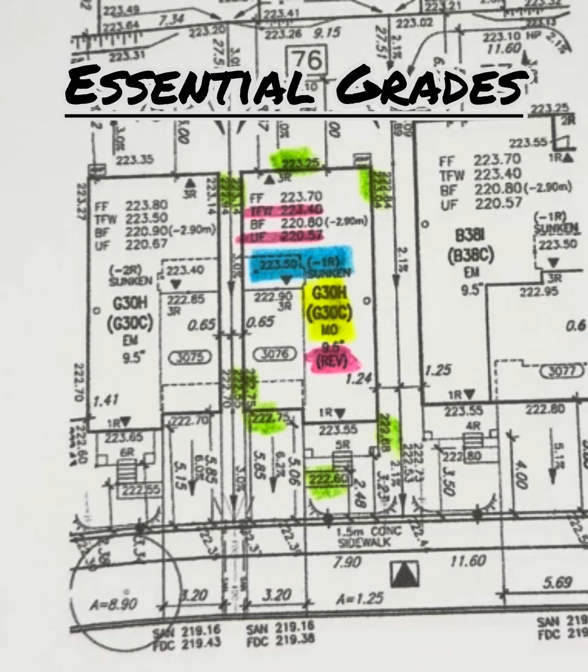All right, let's go through the Lot 76 breakdown. All the critical elements on this plan, with everything clearly highlighted so you can understand exactly what's going on. Here's Lot 76, and I've color-coded all the important features.

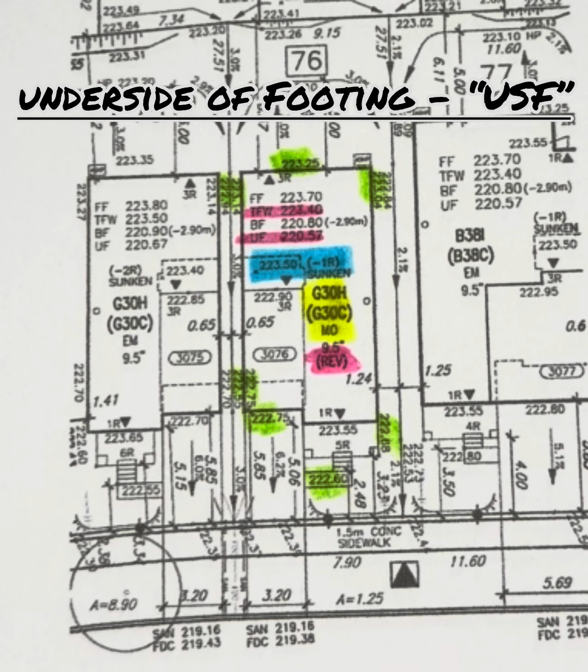Starting with the top of the foundation wall, highlighted in pink, we are at 223.40 meters above sea level. Then we have the underside of footing, also in pink, at 220.57 meters above sea level. These elevations define your structural foundation height and are key for everything that follows.

Next up, highlighted in yellow, we have the model type. This is a G30H MO modern elevation. And this one is also a reverse plan, meaning that the porch is on the right-hand side instead of the typical left.

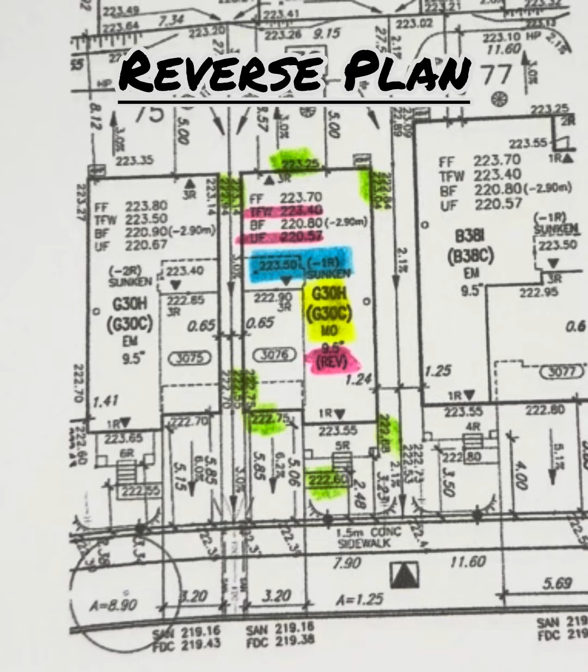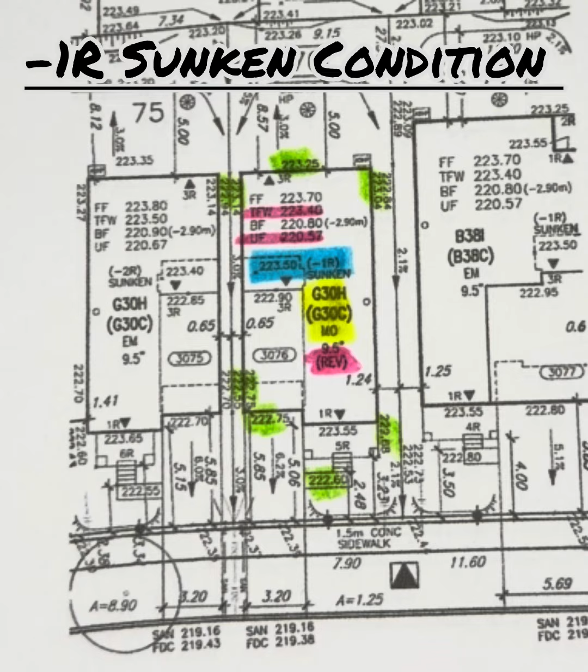Now let's zoom in on blue. Now let's correct something important. The blue highlighted area is not a sunken garage. It represents a sunken landing at the back of the garage. In this case, it's a one-riser drop. That translates to a roughly 7.5-inch drop from the top of the foundation wall down to the sunken landing. This is a small but critical detail because it affects transitions, drainage, and how the slab steps down in that area.

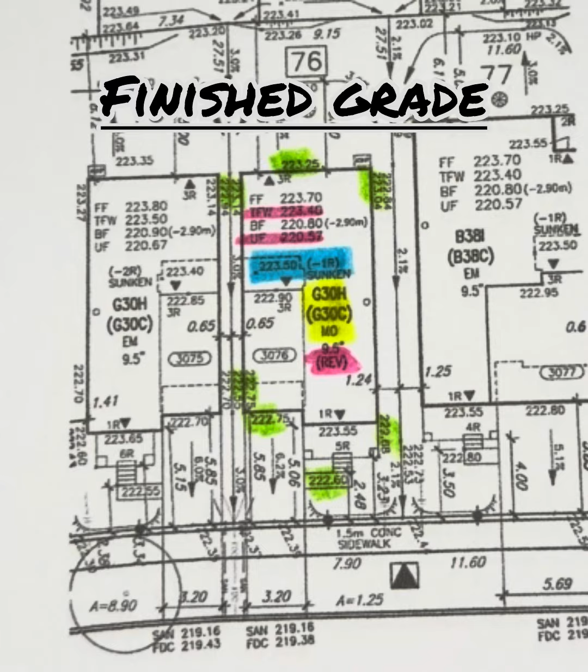Let's zoom to the green highlights. All the green highlights around the foundation show a difference between the top of the foundation wall and finished grade. This is one of the most important parts of the entire drawing because it determines how the house will sit on the lot visually, how much brick veneer is required, whether veneering is needed at all, and it makes preparing the cut sheet much easier.

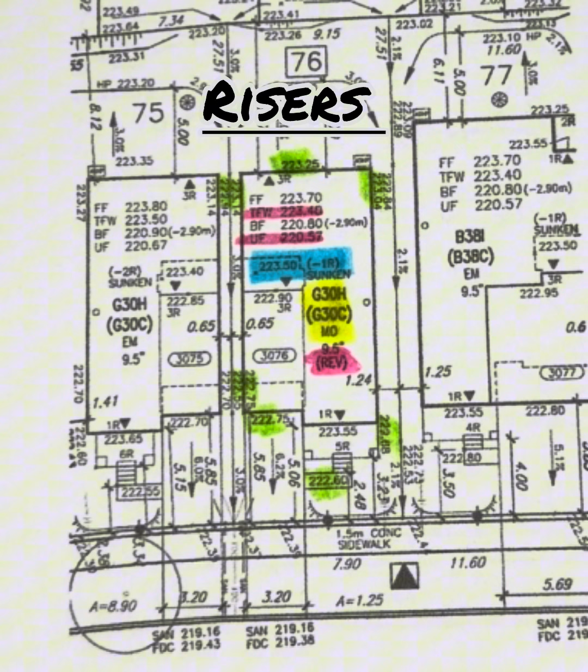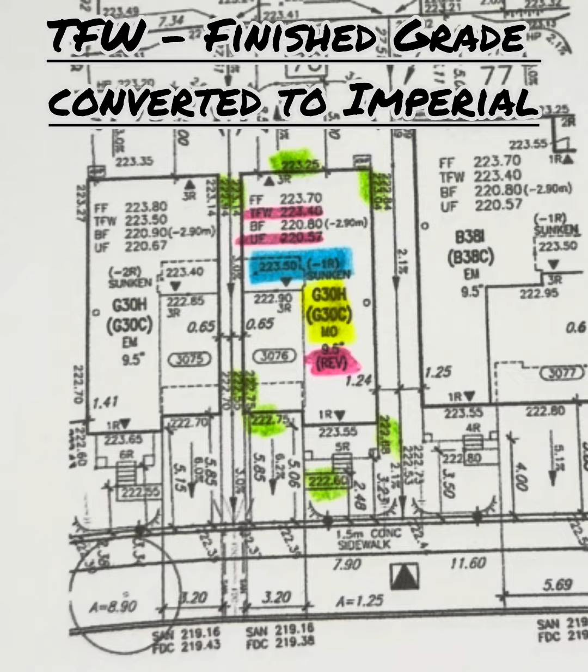Imperial conversion note. Now here's the key step. Even though everything here is in metric, we have to convert to imperial. That's because in low-rise residential construction, all working drawings and cut sheets are done in imperial. So accurate conversion is essential before moving forward. That's Lot 76. Once you understand these relationships, everything from grading to steps to finishes becomes much easier to plan. Now let's dive into how to calculate the finished grades around the foundation walls.

Okay, now we're going to establish the grades around the home, taking the top foundation wall number here, which is 223.40, and we're going to take away the finished grade numbers in green all the way around the foundation to determine how much exposed concrete we have across the entire envelope of the building. For example, if we have 6 to 12 inches of exposed concrete after we subtract the finished grade number from the top foundation wall number, then no brick veneer is required. We can leave it standard.

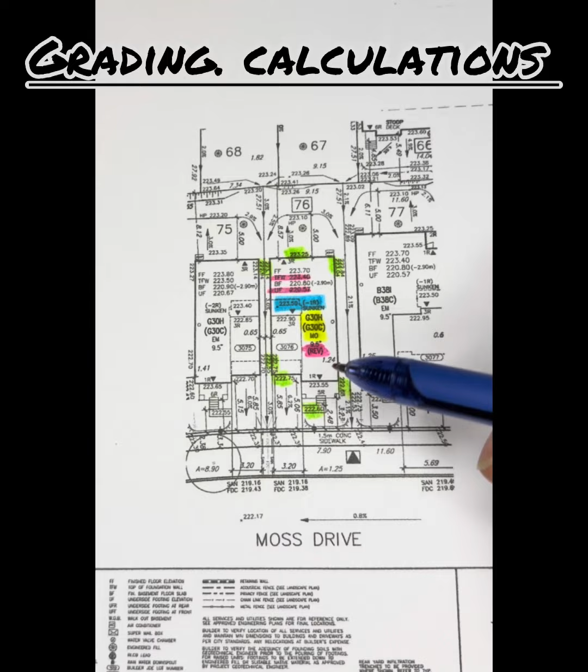If you exceed that 12 inches of exposed concrete, start getting into the 16s, the 18s, the 20s, the 24s, then we have to implement what's called brick veneer. Anyways, let's get into some calculations. We'll start right at the back. Again, our foundation number is 223.40, and we're going to take away 223.25, which is 15 centimeters. And remember, we have to convert this into imperial. So that ends up being 6 inches. And we'll just highlight that.

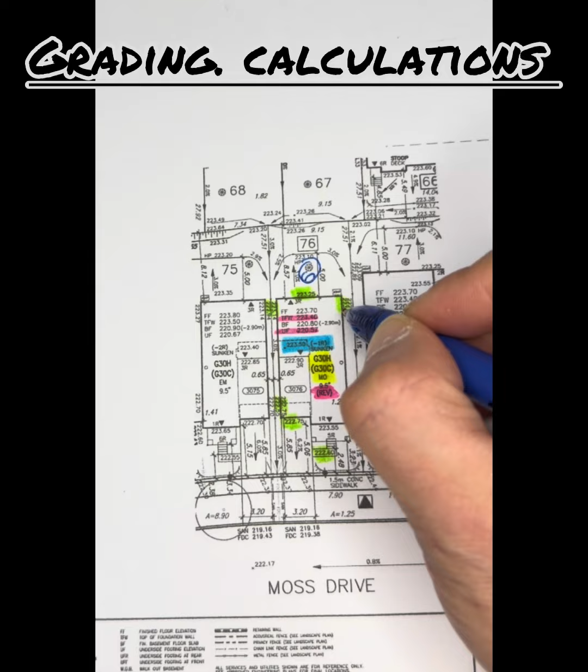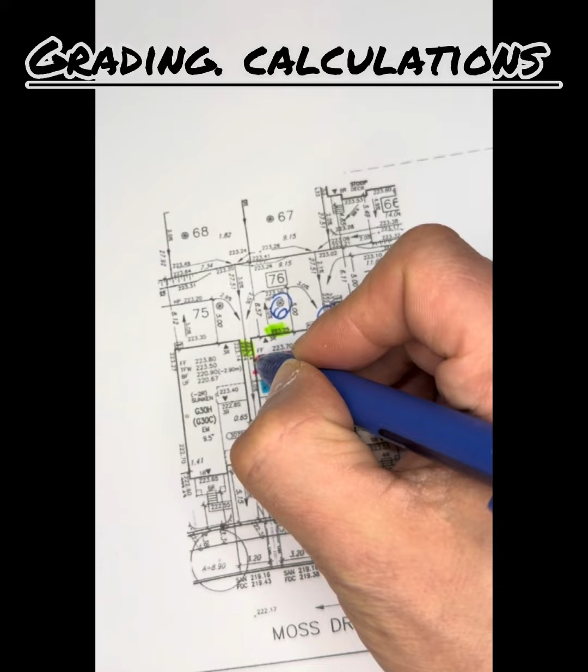Moving around the corner. Again, top foundation wall number, 223.4. And we're going to take away, if I can read this properly because it's very small, 223.04, which leaves us with 36 centimeters or 14 inches on the corner. So we'll write 14. On the other corner here, again, 223.40, take away 223.14. Leaves us 26 centimeters, converted into imperial, is 10.

So now we have our grades established in the back. 10 inches of exposed concrete, 6 inches of exposed concrete, and 14 inches of exposed concrete. So what we know now is that there is no veneer or anything else required in the back. It's a very standard elevation home in the rear. Now we're going to move alongside to the garage at the front.

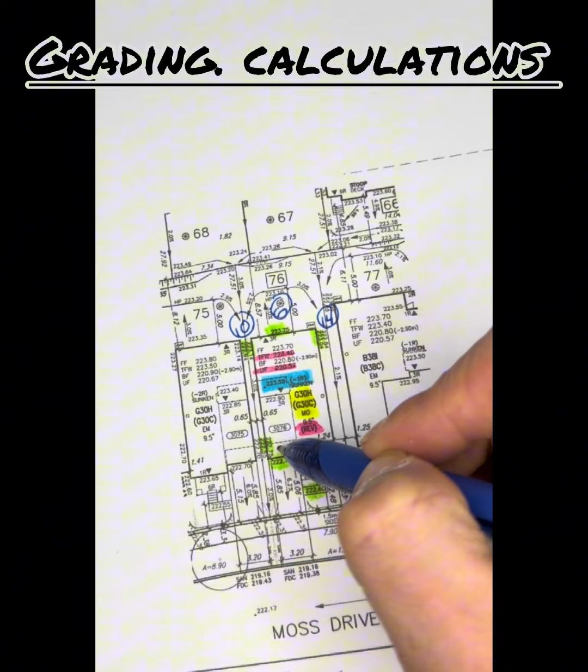So again, our 223.40 number, our top foundation wall. And we are going to subtract our 222.75. And that leaves us with 64 centimeters or 25 inches. So we're going to write 25 here at the corner. And the garage is the same number. So we're going to write 25 here at the garage.

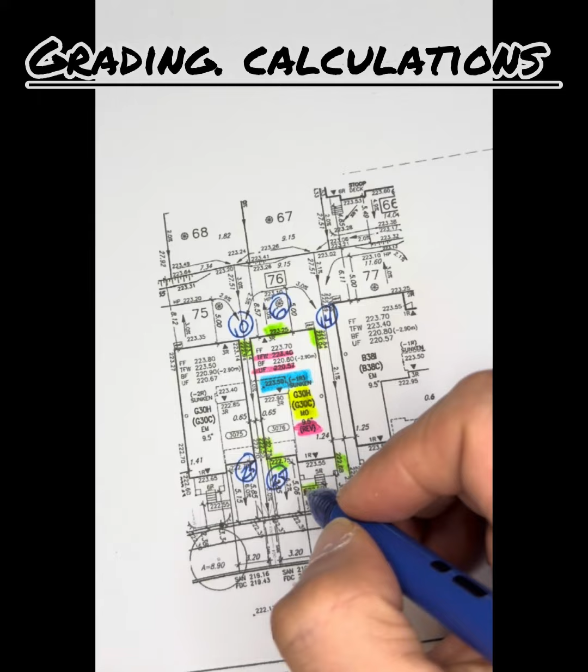Now we're going to get right in front of the porch here. Again, 223.40 minus 222.6 leaves us with 80 centimeters or 32 inches. So we'll write 32 inches right here. And then finally, our last number here that we're going to calculate, again, 223.40 against 222.

Oh my goodness, I can't even see it. 68 is going to leave us with 72 centimeters or 28 inches. So that makes total sense.

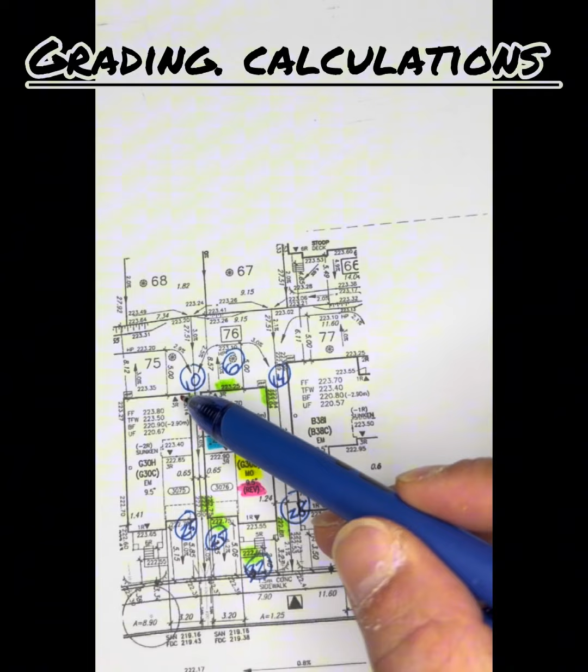So what you're going to see here now is that we have a pretty standard elevation, grade in the back with an apron swale, bring the water there, and then it comes down. So this is a rear to front drainage home. So all the water is going to travel through that swale. It's going to come down the side of the house, and it's going to go all the way through, and it's going to dissipate into the front yard and the sidewalk and the curb and all over through the street and catch basins, etc.

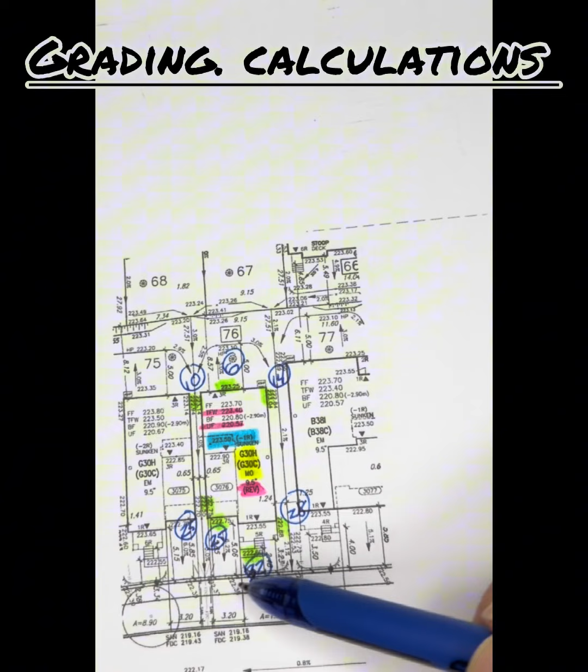So here we have a pretty typical front where we have 25 inches of exposed concrete at the front of the home where the garage is, drops to 32 in front of the porch, and then climbs up at 28. So that means we do have positive drainage away from the home, coming away down, down, down, and down, and then coming back up to meet this swale up here. So that's how we calculate our grades around the home. These are the critical grades around the house.

This will help us determine our brick veneer, if required, for when we do our cut sheet, which we will, as we can tell these numbers. We do not want 28 inches or 32 inches or 25 inches of exposed concrete on a home. We want to sit around 12 inches of exposed concrete. I find that looks the best in terms of a look. It's a good golden rule to stand by.

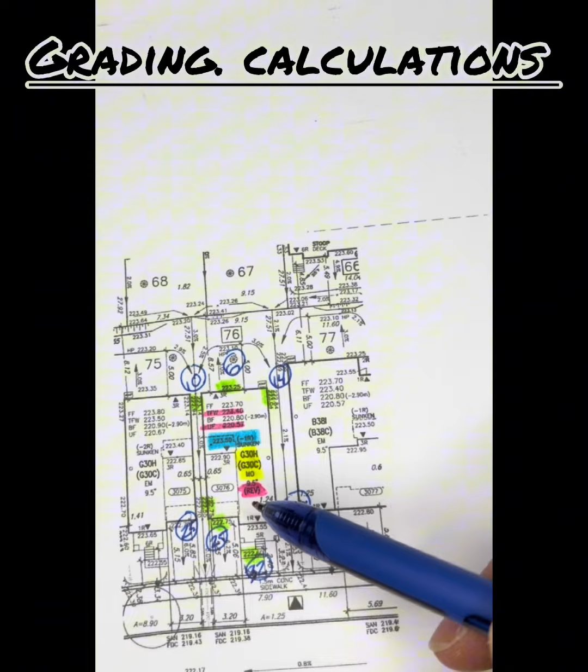And the last thing to go over in this video are the sanitary and storm inverts. You can see on the site plan that it indicates a double connection, meaning that one trench will service 2 lots. This is a much more efficient way compared to the developer installing individual services to each home. These connections typically fall between 2 driveways.

The most important element here is verifying the lateral invert elevations for both of the sanitary and storm are lower than the underside of footing or UF. If they are not, water will not naturally flow away from the home by gravity, which is a very serious issue. If you ever encounter this situation, you must have the developer adjust the laterals before any connection is made.

Also, keep in mind that sometimes the design drawings may show the acceptable elevations, but the field conditions can differ once constructed. That's why verification on site is critical. We require a minimum 2% slope for sanitary connections and 1% slope for storm connections. These are the absolute minimums, but more slope is always better.

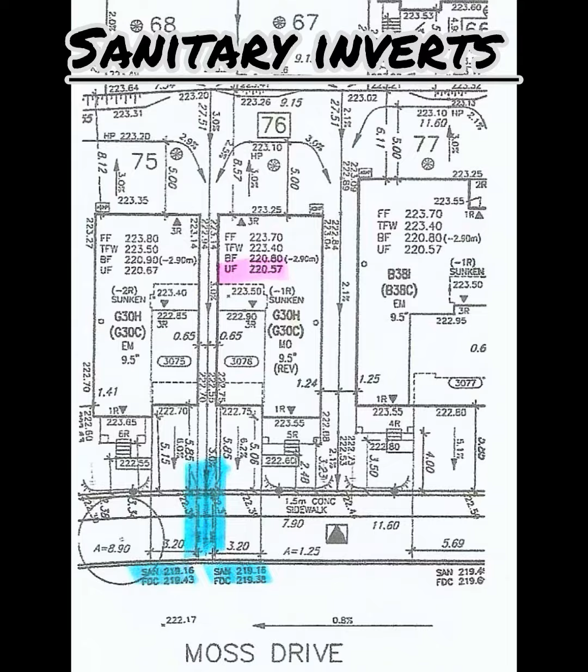In this case, we are in good shape. The underside of footing elevation is 220.57, and the storm invert is 219.38, and the storm is typically higher than the sanitary, giving us a 1.19 meter drop. That is plenty of fall and exactly what we want to see.

Builder notes. Always review all critical siting information carefully prior to construction start. Ensure all required elements are clearly identified, as conditions and requirements may vary from site to site and between municipalities. Always verify the following: top foundation wall, underside of footing, model type, standard versus reverse model, sunken conditions, and front porch risers. These elements are essential to establishing proper elevations and overall build accuracy.

Calculate the difference between the top foundation wall and the finished grade around the home to determine the elevation difference between the top foundation wall and future grass levels. This step is critical to achieving proper drainage and visual consistency. Always convert metric values into imperial measurements, as low-rise residential construction typically builds using imperial standards.

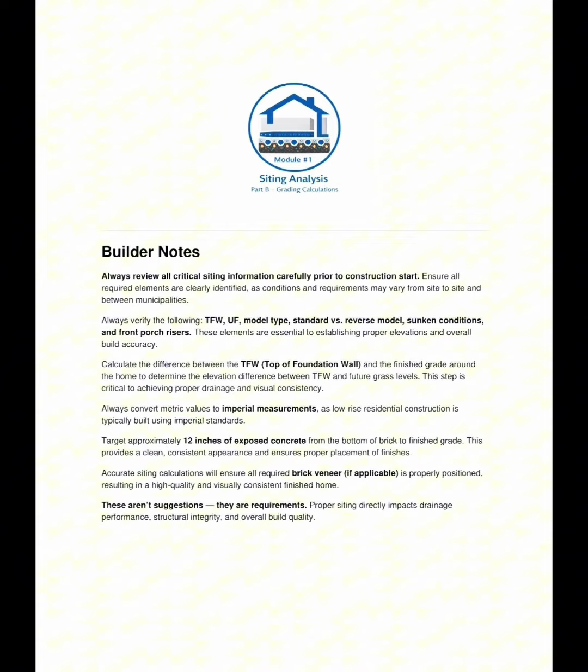Target approximately 12 inches of exposed concrete from the bottom of the brick to the finished grade. This provides a clean, consistent appearance and ensures proper placement of finishes. Accurate siting calculations will ensure all required brick veneer, if applicable, is properly positioned, resulting in a high quality and visually consistent finished home. These aren't just suggestions, they are requirements. Proper siting directly impacts drainage performance, structural integrity, and overall build quality.

Well, everyone, that's about it for this one. Remember, this isn't just paperwork. If your elevations are off, everything downstream is a problem. Get your siting right, verify your numbers, and you'll avoid major issues on site.